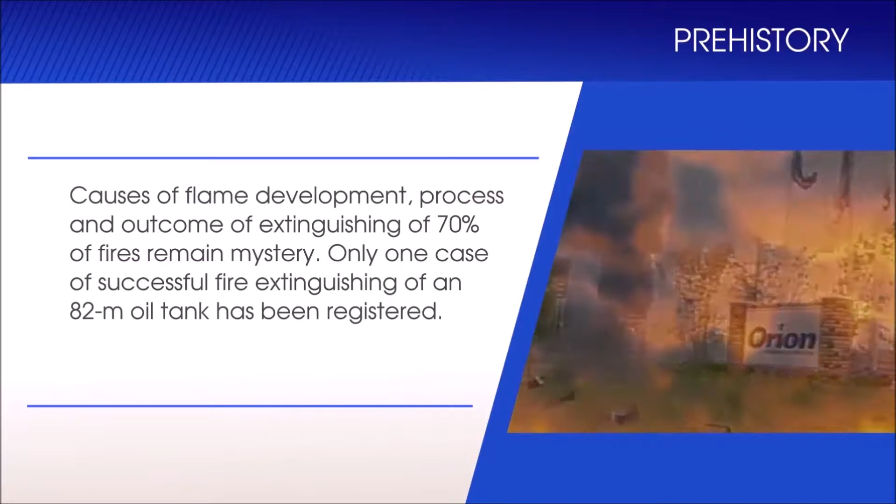Firefighting Impulse Storm, Technologies and Systems. 15 to 20 severe fires take place in oil, alcohol, and petrol storage facilities every year. According to last fire data, complete information about a fire and the consequences of its extinguishing can be received in only 30% of cases. The causes of flame development, process, and outcome of extinguishing of 70% of fires remain a mystery.

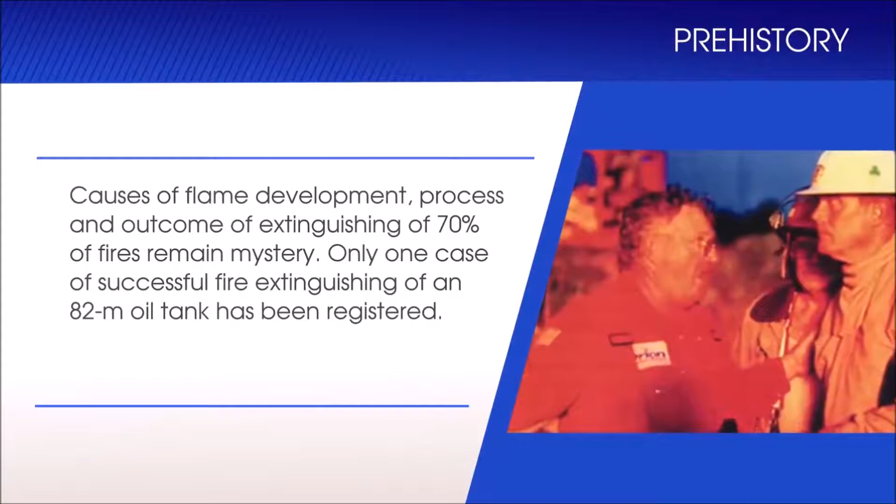Only one case of successful fire extinguishing of an 82-meter oil tank has been registered. The tank was extinguished in the United States of America at the Orion Oil Storage Facility using non-standard, extra-powerful equipment that had been delivered from another region specially for this purpose. Not a single case of an oil tank fire extinguished successfully with the help of fixed or semi-fixed firefighting equipment has been registered anywhere in the world so far.

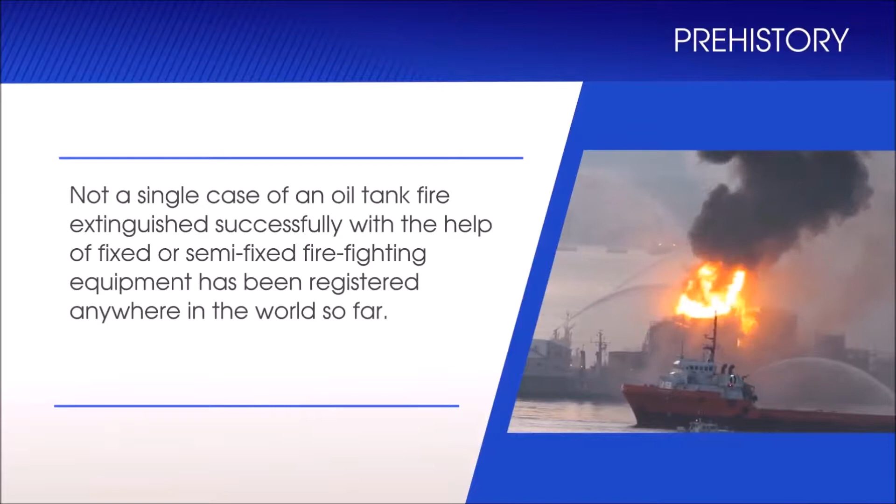The description of the fire at the Houston Chemical Complex in 1989 and the reasons of its failed extinguishing can be used as a generalized picture of all cases of fire extinguishing at oil storage facilities. A quotation from the United States Firefighters Report. A devastating series of explosions and fire. The firefighting water system at the Houston Chemical Complex was part of the process water system. When the first explosion occurred, some fire hydrants were sheared off at ground level by the blast. The result was inadequate water pressure for firefighting.

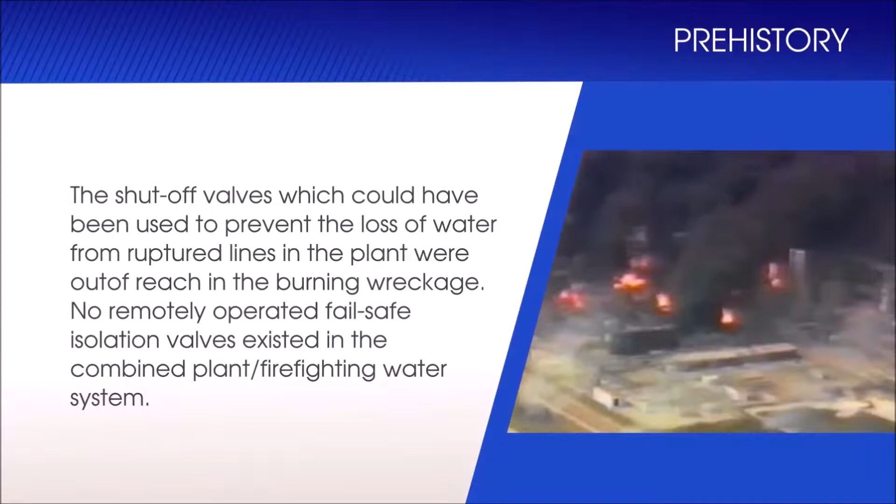The shutoff valves, which could have been used to prevent the loss of water from ruptured lines in the plant, were out of reach in the burning wreckage. No remotely operated fail-safe isolation valves existed in the combined plant or firefighting water system. In addition, the regular service fire water pumps were disabled by the fire, which destroyed their electrical power cables. Of the 3 backup diesel-operated fire pumps, 1 had been taken out of service, and 1 ran out of fuel in about an hour. As a result, the explosions killed 23 employees and injured 314. The property damage losses were estimated at $839 million US dollars.

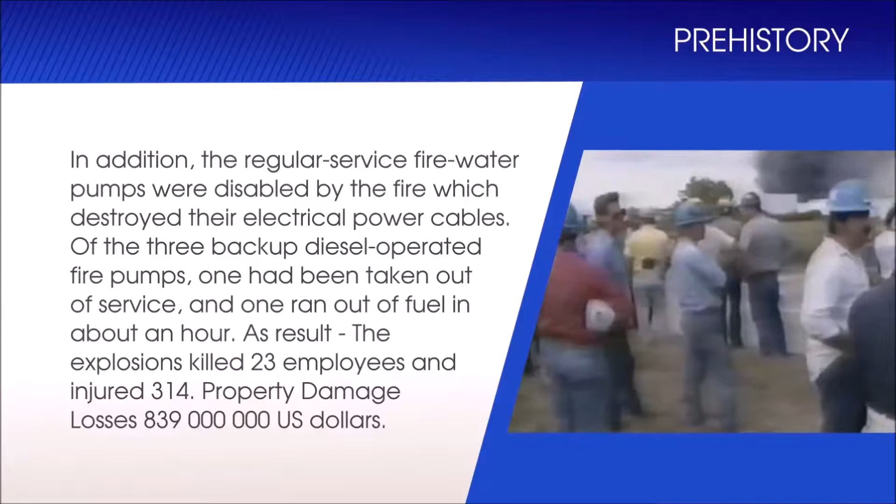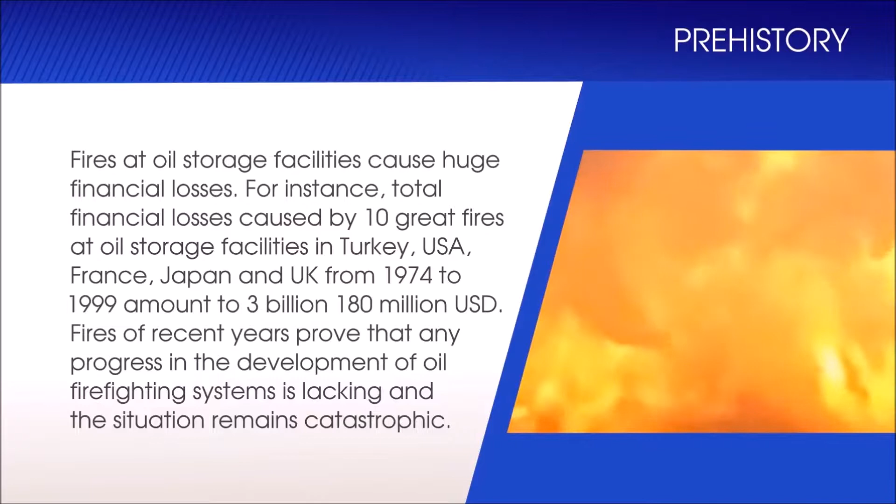Fires at the oil storage facility in Haifa, Israel, on December 26, 2016, and the Shell oil refinery in Rotterdam, the Netherlands, on July 29, 2017, can serve as perfect examples. All local firefighting brigades and dozens of mobilized firefighting teams from other regions could not even start extinguishing the fire. They could only stay and wait until the oil and gas burned out and the burning ceased. The existing means and forces of fire teams all over the world are able only to ensure the cooling of neighboring reservoirs and extinguishing of oil rests after severe fire. Presently, no fixed or mobile firefighting system can extinguish a petroleum tank fire completely.

These incidents show that in any country in the world, regardless of economic strength, fixed fire extinguishing systems installed on storage tanks in hydrocarbon processing facilities and factories cannot provide the solutions they were built for: first response to a fire and extinguishing it in its initial stages.

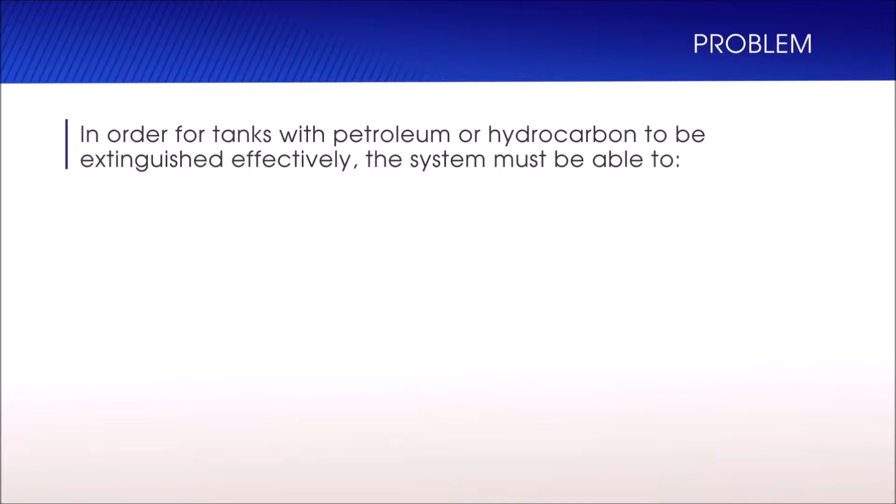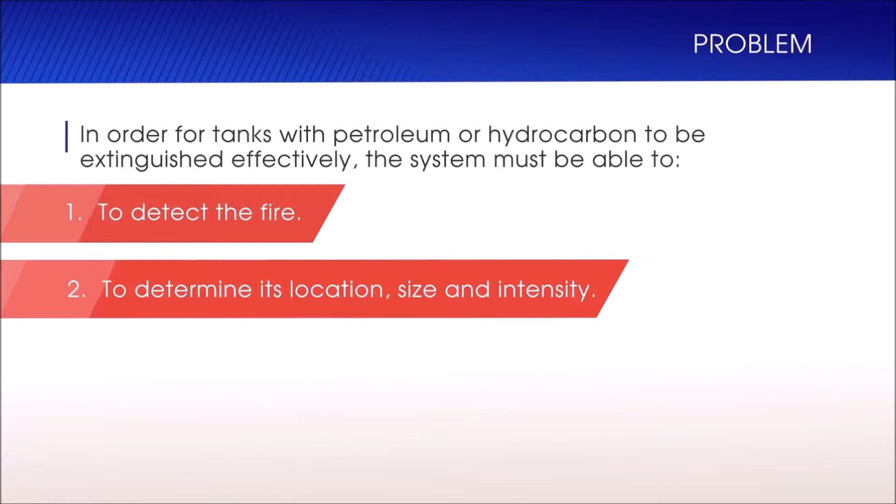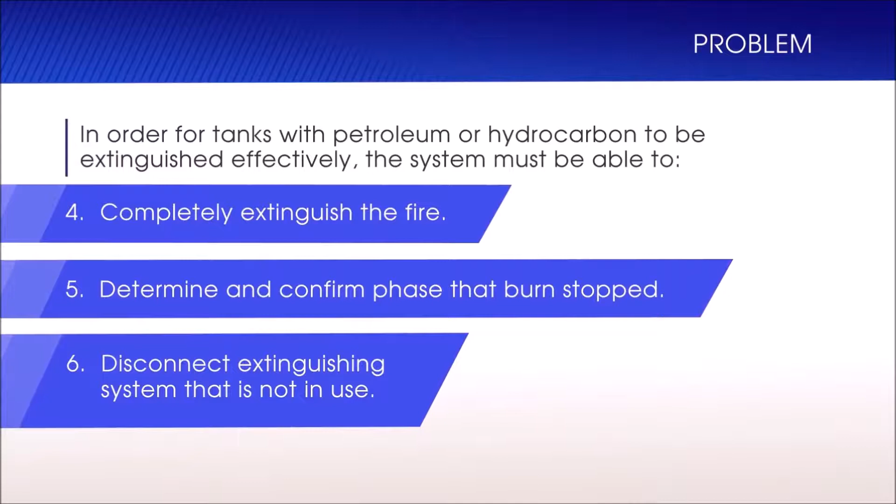In order for tanks with petroleum or hydrocarbons to be extinguished effectively, the system must be able to: 1. Detect the fire. 2. Determine its location, size, and intensity. 3. Turn itself on, and deliver the foam directly to the source of the fire. 4. Completely extinguish the fire. 5. Determine and confirm that the burning has stopped. 6. Disconnect extinguishing systems that are not in use. These 6 points are guaranteed to successfully extinguish any fire for any tank size with any amount of fuel.

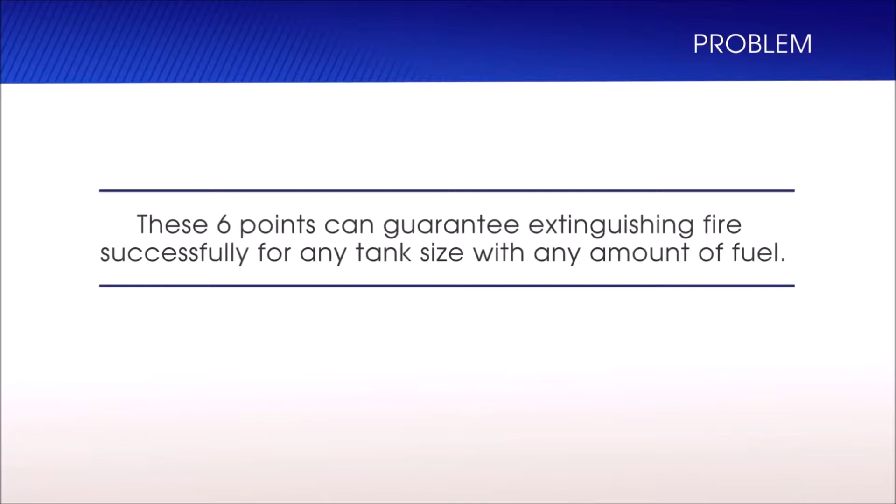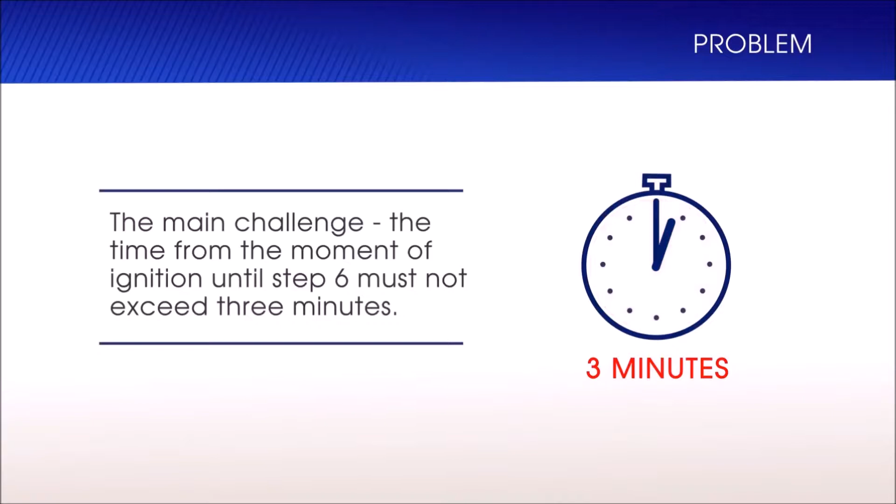The main challenge is the time from the moment of ignition until step 6, which must not exceed 3 minutes. Currently, available systems cannot reach the 4th stage in less than 12 hours. We present the Impulse Storm IS fixed firefighting system, which can reach all 6 stages and completely extinguish any fire in less than 60 seconds. The process: detecting the fire, determining its coordinates, size, and intensity.

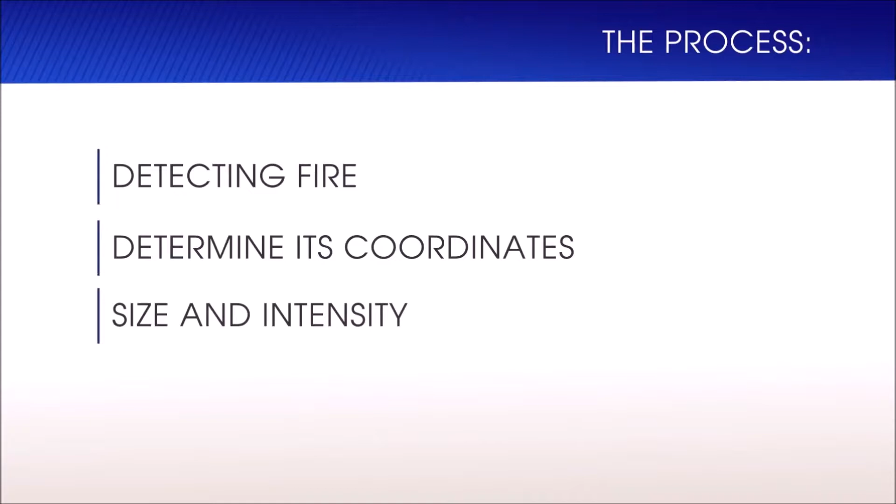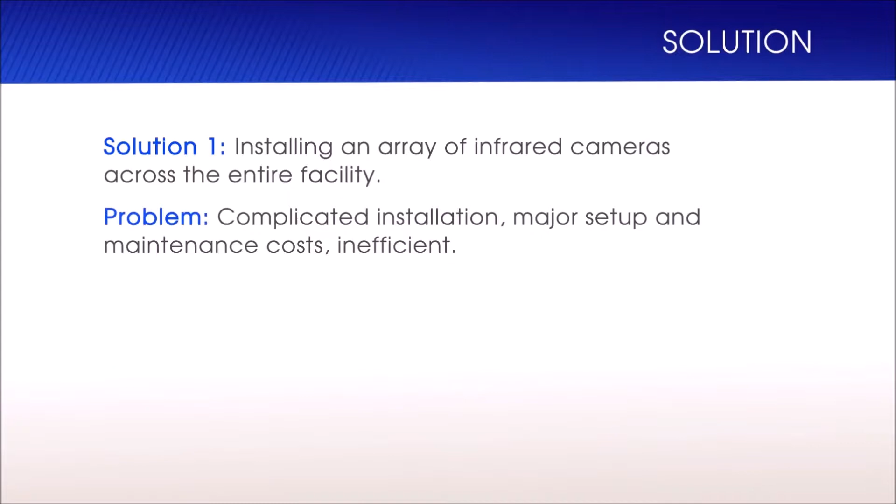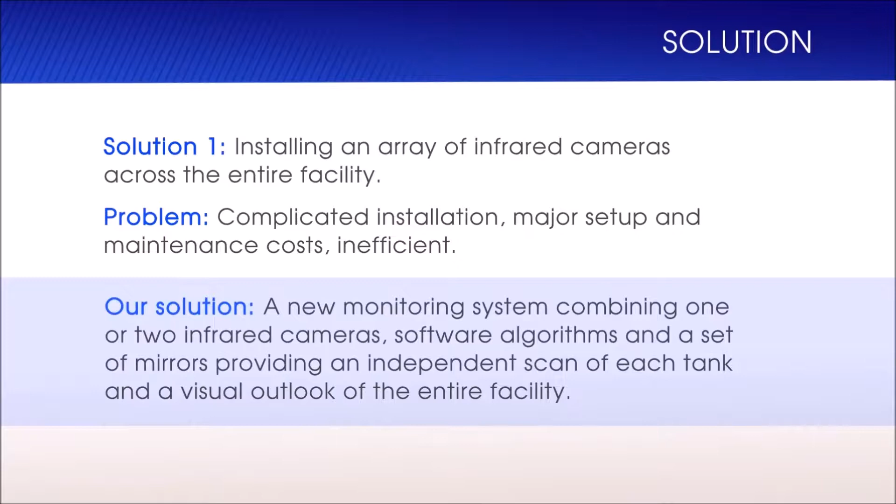Example: a cluster of oil tanks of varying sizes. Monitoring the facility from a single point is impossible. Solution 1. Installing an array of infrared cameras across the entire facility. Problems: complicated installation. Major setup and maintenance costs. Inefficient. Our solution: a new monitoring system combining 1 or 2 infrared cameras, software algorithms, and a set of mirrors providing an independent scan of each tank and a visual outlook of the entire facility.

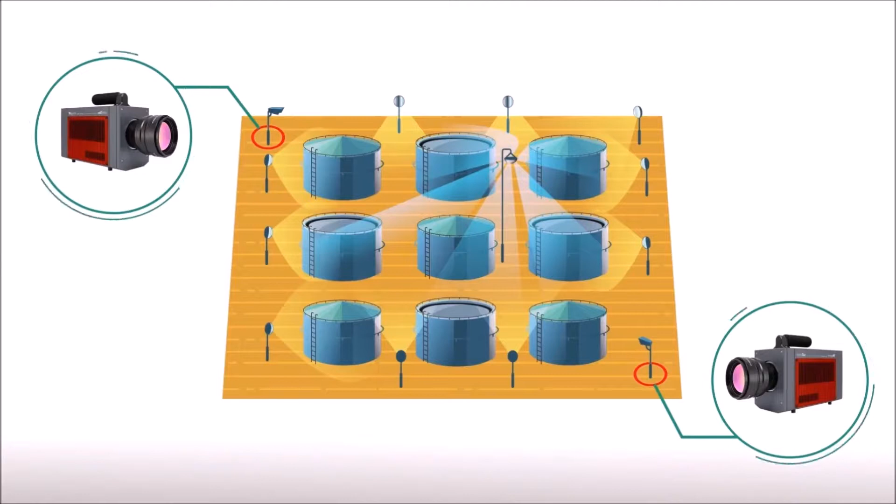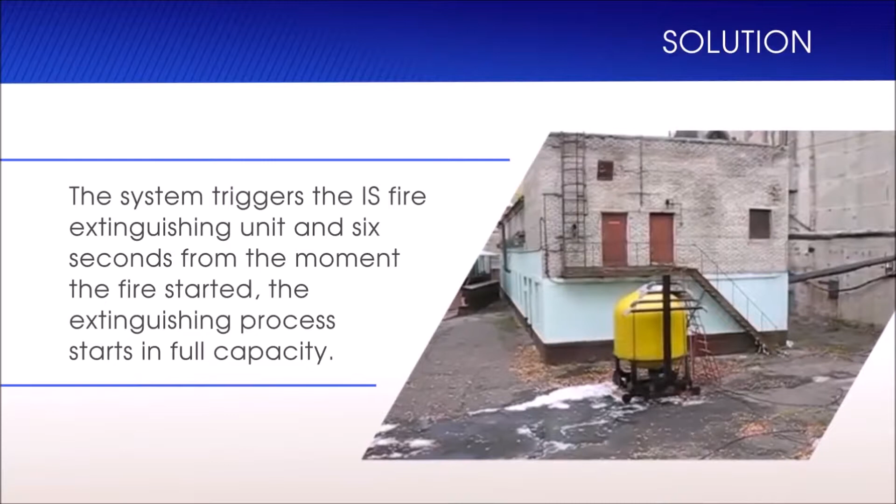Our software analyzes information in real time and can determine the location, size, and intensity of the fire in less than 2 seconds from the moment of ignition. The system triggers the IS fire extinguishing unit and, 6 seconds from the moment the fire started, the extinguishing process starts in full capacity. IS creates supercompressed foam bubbles using very high pressure and neutral gas. The foam expands from the moment it leaves the IS container, goes through pipes at a very high speed, and reaches the top of the tank, where it maintains its speed as it comes out through the nozzle, covering the burning surface.

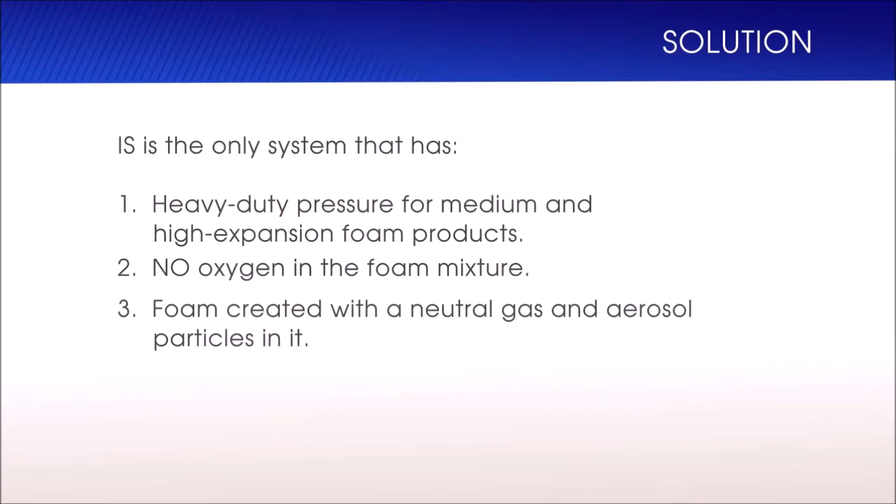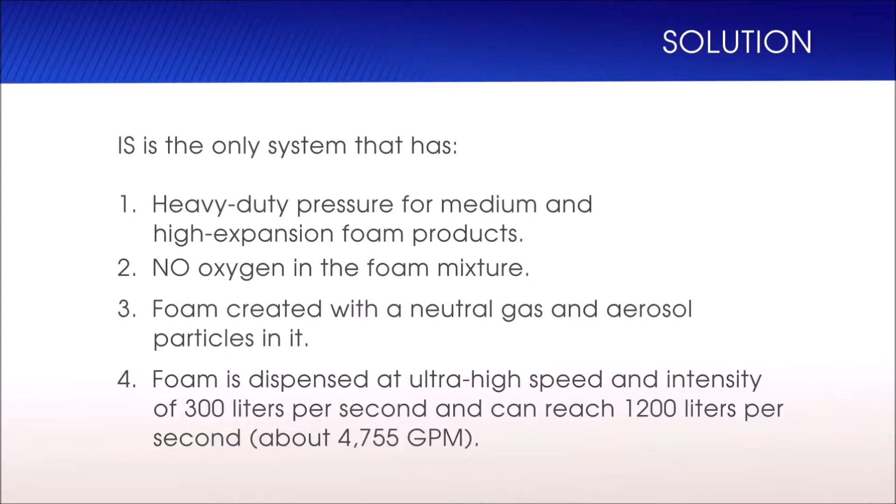IS is the only system that has: 1. Heavy-duty pressure for medium and high expansion foam products. 2. No oxygen in the foam mixture. 3. Foam created with a neutral gas and containing aerosol particles. 4. Foam dispensed at ultra-high speed and intensity of 300 liters per second and can reach 1,200 liters per second, about 4,755 gallons per minute.

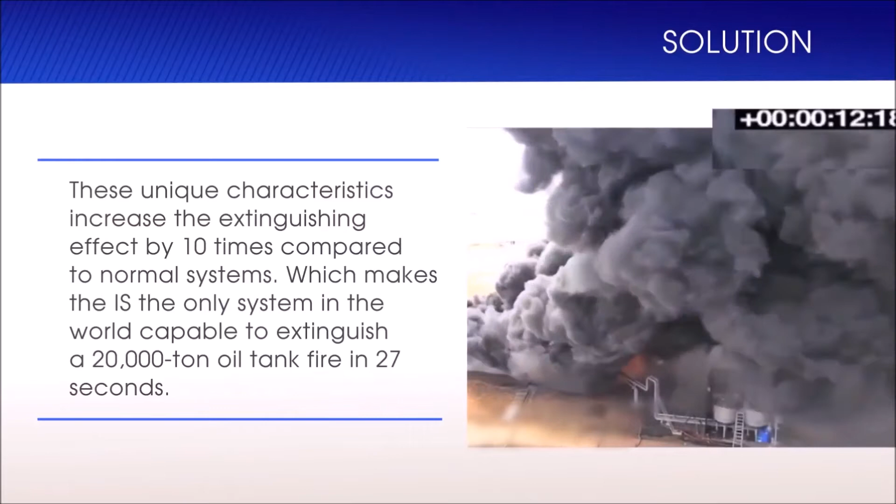These unique characteristics increase the extinguishing effect by 10 times compared to normal systems. This makes the IS the only system in the world capable of extinguishing a 20,000-ton oil tank fire in 27 seconds. Comparing IS with any other system in the market is impossible, because there is no other system that can extinguish a 20,000-ton tank fire by itself.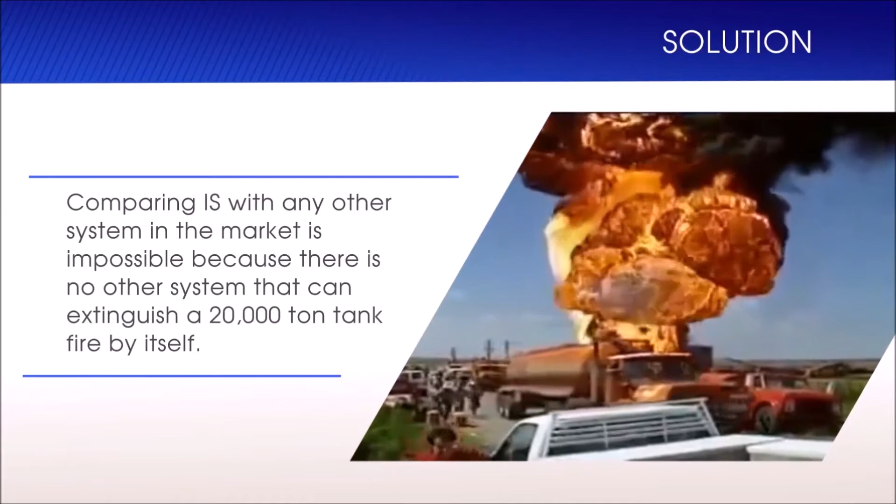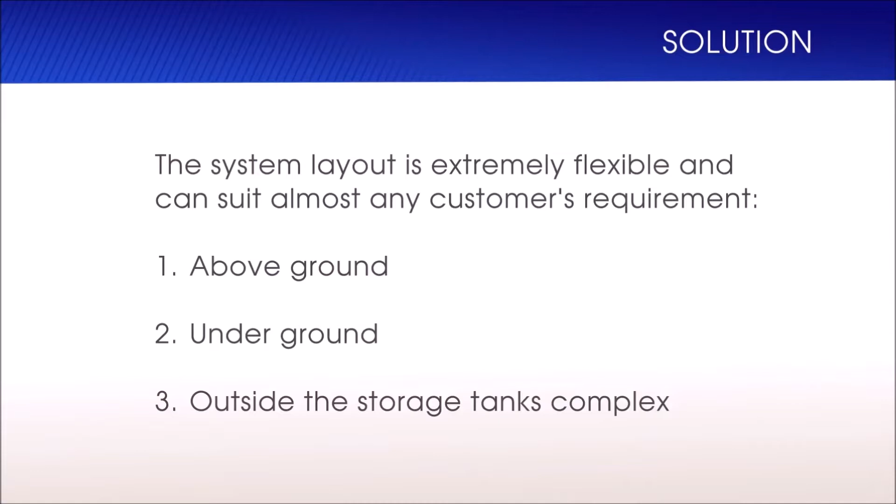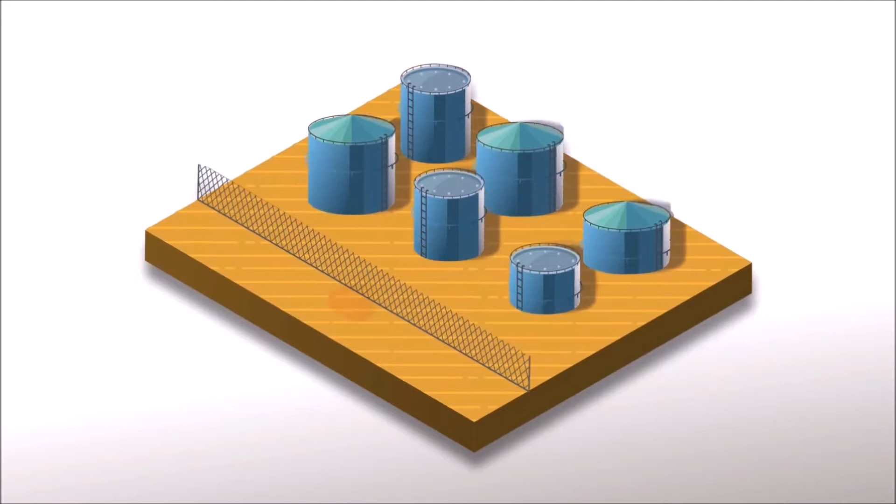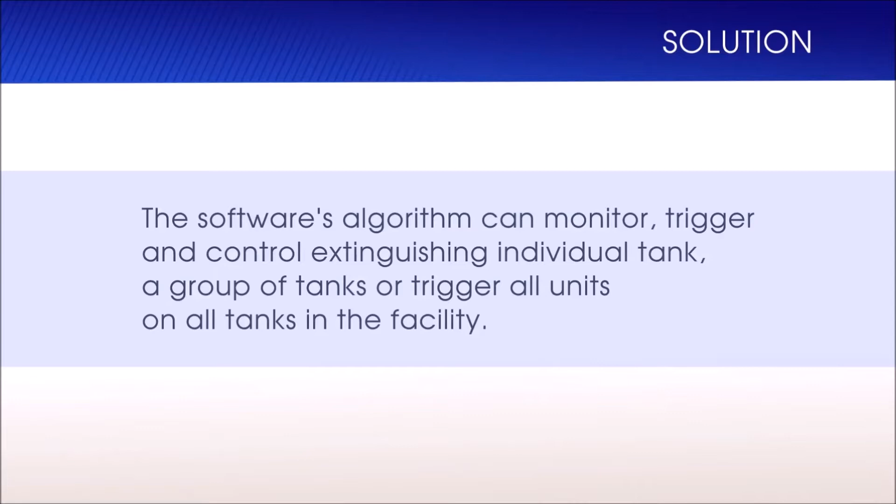The system layout is extremely flexible and can suit almost any customer's requirements. 1. Above ground. 2. Underground. 3. Outside the storage tank complex. The software's algorithm can monitor, trigger, and control the extinguishing of an individual tank, a group of tanks, or trigger all units on all tanks in the facility.

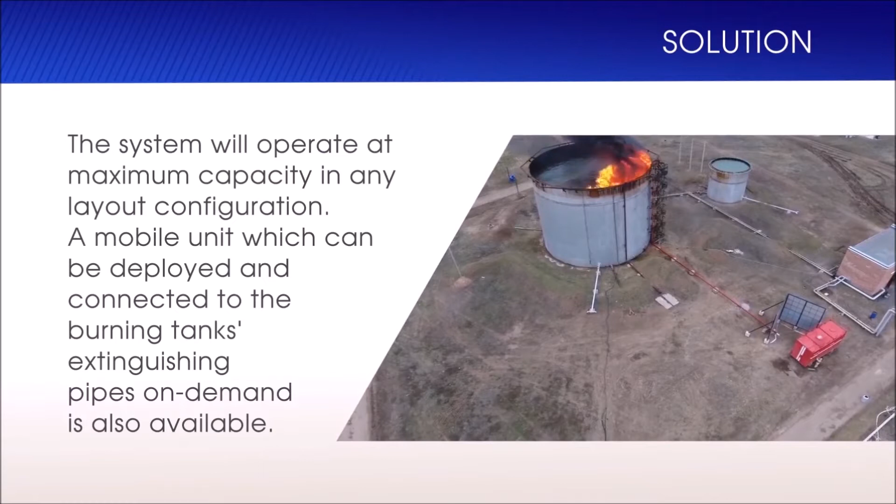The system will operate at maximum capacity in any layout configuration. A mobile unit which can be deployed and connected to the burning tank's extinguishing pipes is also available on demand.